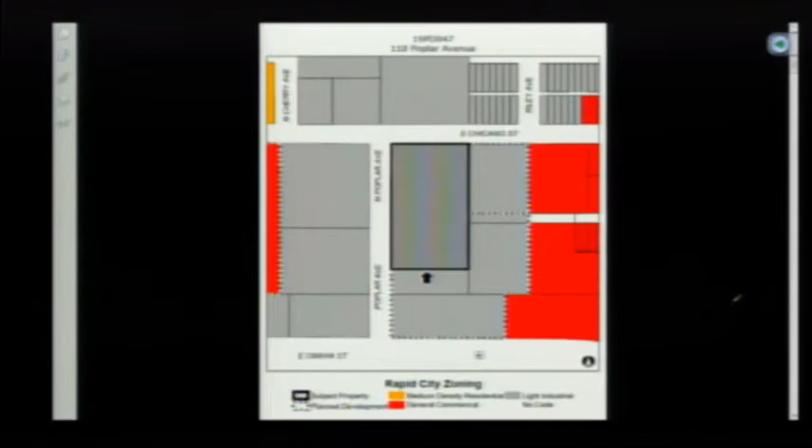Property zoned light industrial district, and it's in an established light industrial corridor north of East Omaha Street. And the future land use is identified as light industrial, so the use is appropriate in the area. Here we have the major street plan showing it's kind of boxed in with some arterial streets with access directly onto Omaha.

The applicant's proposed site plan involves constructing additional parking on site, thus the reduction from 63 spaces to 20. Part of their justification is that the 13 existing parking spaces along Poplar Avenue provide sufficient customer parking, and there are 2 ADA accessible spaces.

The issue with these parking spaces is that they back directly into the right-of-way. There's no space in that area for them to back out without entering the right-of-way. That's one of the main concerns our Public Works Department has, since with a building permit, sidewalk will be required along East Chicago Street and North Poplar. With that sidewalk going in and vehicles backing out into it, it's a safety issue for pedestrians. In addition, should Poplar Avenue be reconstructed in the future, they'll probably be getting curb along here, which would eliminate those parking spaces.

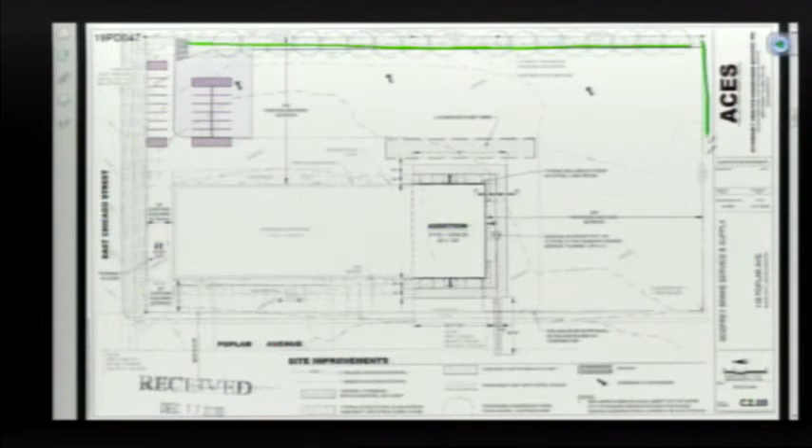Staff would be willing to grant the exception to waive the requirement to provide the opaque screening fence along that north and east property lines. The intent of the opaque screening fence is aesthetic as well as security for the property, creating that streetscape by keeping inoperable vehicles, or vehicles being serviced, screened so that the aesthetics of the site are maintained.

Granting that exception, the stipulation says we would still require the opaque screening fence along the west property line where the storage area is, and on the north side of the property where the parking would end. Again, we're looking at compromise here.

The final exception is to reduce the landscaping. They are proposing new landscaping along this east property line, which as I noted provides some of the screening intended by that screening fence. But what we're missing is landscaping, intended to beautify the property and the area, and it is supported by the comprehensive plan.

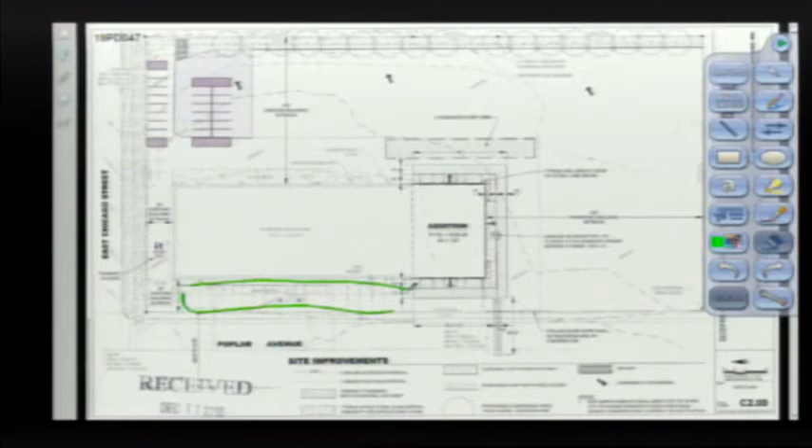Removing these 13 parking spaces which back into the right-of-way, and replacing that with landscaping, plus adding landscaping along the north side, would provide additional landscaping points. So we would recommend approving that exception contingent upon those parking spaces being removed and replaced with landscaping, and additional landscaping being provided along that north property line.

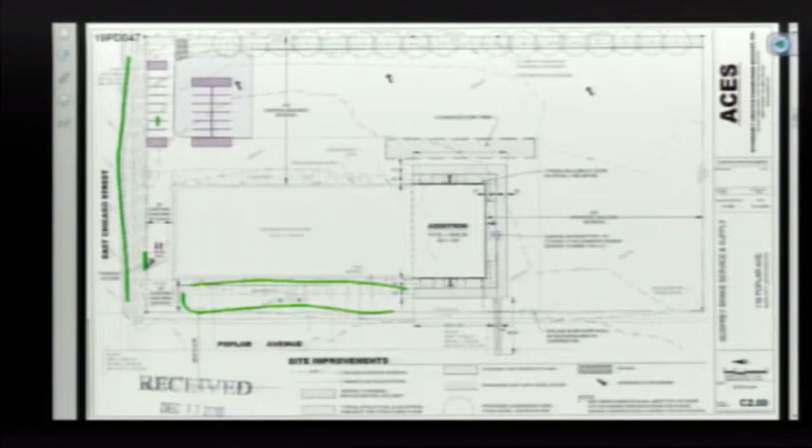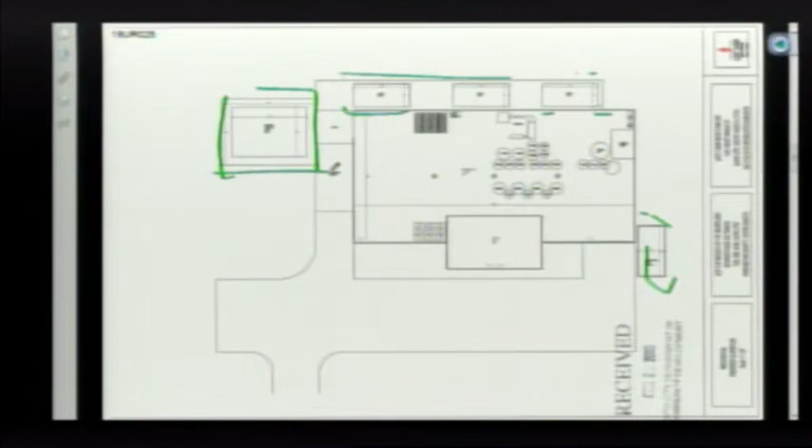Again, this is a great project for the city. We hope the applicant has all the success, and staff is recommending approval of the conditional use permit. Thanks, Fletcher. Any questions for staff on this one? Comments? Karen made the motion to approve item number 4 with the staff stipulations, and Mike Goller seconded that motion. Any discussion on the motion? All those in favor, please say aye. Aye. Opposed? Motion carries.